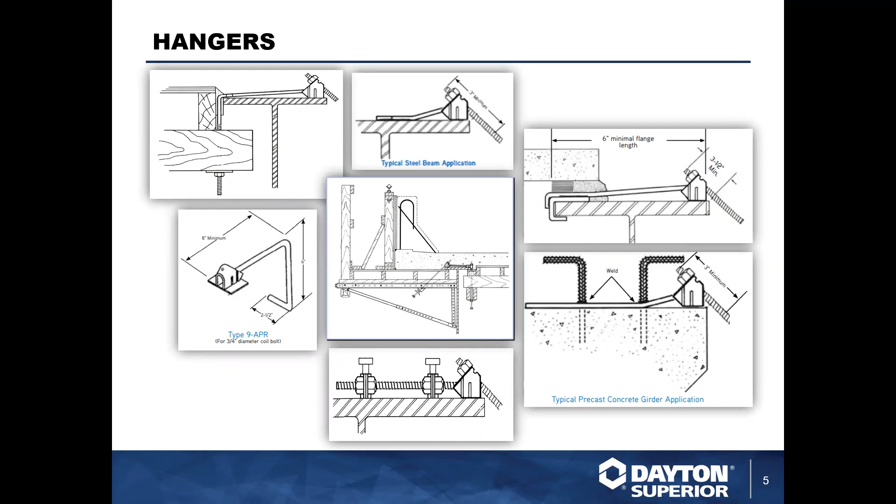Typically steel beams would have hangers that would either wrap around the steel beam or get welded to the top of it. Precast beams would actually require hangers that would be cast at the precast yard into the beam. And if you don't catch the beam in time as far as production goes, we do have hangers that will attach to some of the exposed steel sticking out of a precast girder, such as rebar, or even with steel construction you may have a Nelson stud sticking out of it.

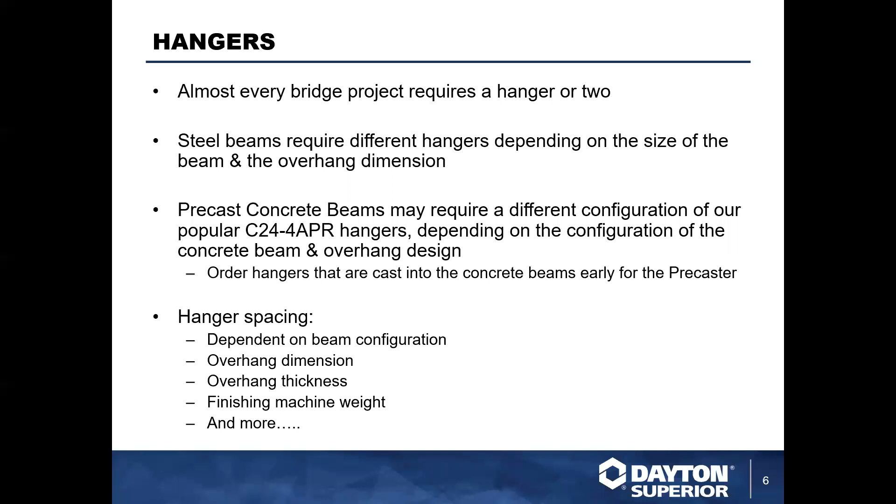Hanger spacing typically depends on the beam configuration, the overhang dimension, how much concrete is suspended off the edge of the girder, and the thickness of the concrete. The big one that a lot of people don't take into consideration is whether the finishing machine is running off of the girder or off the overhang bracket. At any given point, that finishing machine can be 60 to 80% of the weight that the overhang bracket has to support. So typically the concrete weight is minimal, it's the weight of the finishing machine.

So with that, we have overhang brackets. A lot of contractors own their own brackets and everything else. The C49 bracket was one of the original brackets in the marketplace. It comes with a 54-inch horizontal leg, which is the actual formwork support. The vertical leg on a standard C49 is 30 to 50 inches. A C49D is 50 to 70 inches, for beams that are much deeper where they want to get that diagonal leg closer to the bottom of the beam. And then we have the C49S, the S stands for shorty.

What we basically do is modify a standard C49 to get that C49S.

All of these brackets have a 3,750 pound safe working load, that is 2 to 1.

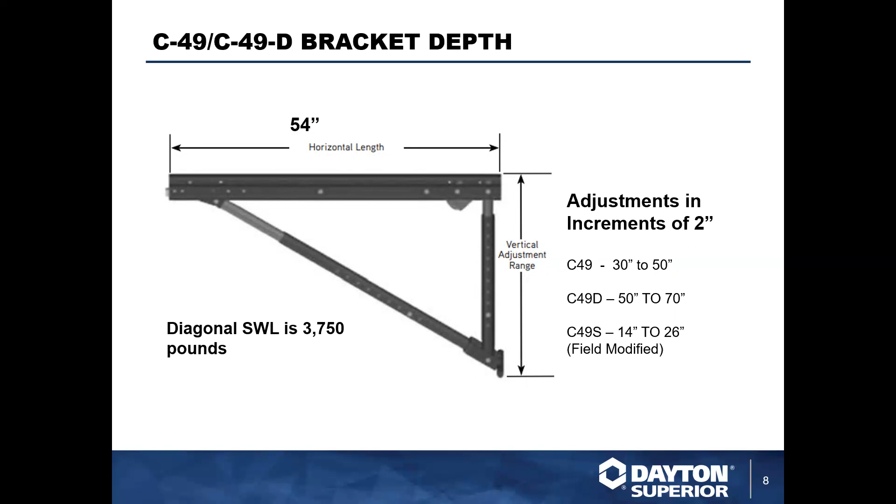All these brackets typically use a standard coil bolt, a 1/2-inch coil bolt. I like to use an adjustable coil bolt, because if you're doing bridge work, I'm going to assume you're not just doing one job and done. A lot of times bridge contractors go from job to job to job. The coil bolt is reusable, as long as it's not bent or corroded too bad. Typically I like the 24-inch because that gives you a long, versatile adjustment, basically a lot of adjustment within that bolt to make the connection. A lot of guys will use shorter ones to shorten connections up. Depending on what state you're working in, that may be completely feasible, especially if you're working in multiple states or have a wide array of bridge designs within your state.

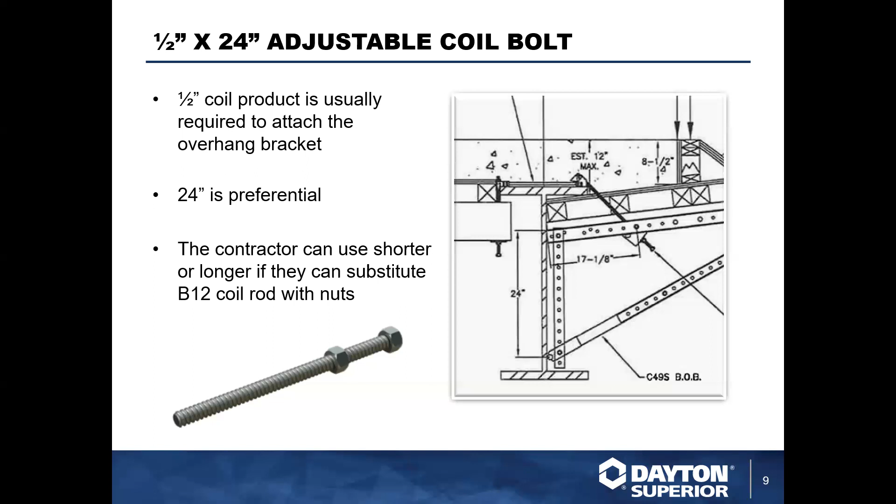We also have a C51 wall plate adapter. This comes in handy for a couple of things. You can cast an insert into a precast box beam and place your overhang bracket off of that, or you can cast an insert into a concrete wall and use the wall plate to attach to your overhang bracket. Now you have your forming package right there, or you can use your bracket as a scaffold bracket. So this kind of double dips as far as the abilities it gives you.

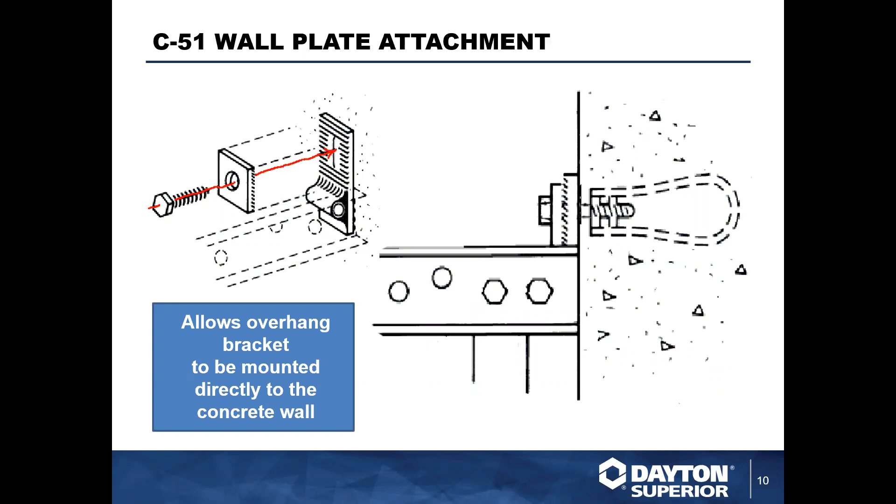Typically it's a 2-component piece. You have the main piece that actually connects to the overhang bracket with that 1/2-inch by 3-inch NC threaded bolt that's already attached to the bracket. And you have a serrated plate, which has serrations on it to give you a little bit of adjustment there.

With that, you also have overhang guardrail extensions. The guardrail extension gives you a maximum of 20 inches of walkway space. I said walkway, so you can put that out there for people to walk on, but they cannot form concrete off of it. It's not designed for that. It's designed for just human foot traffic, or live load.

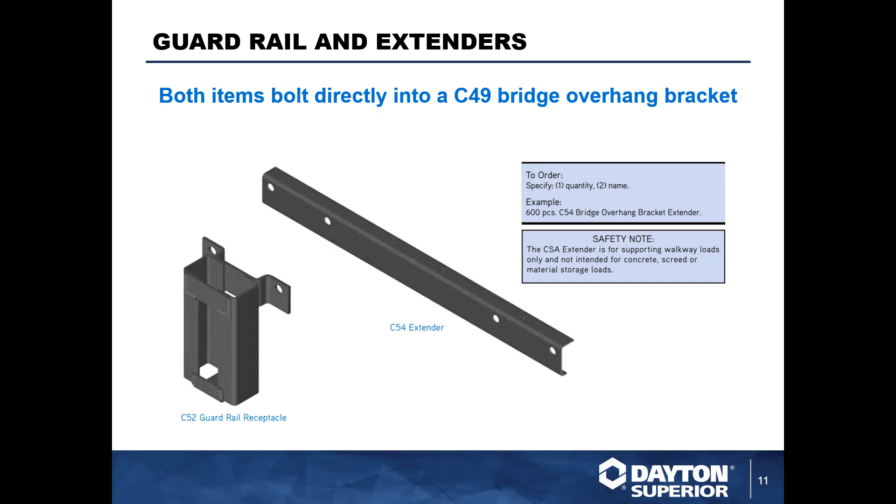We also have our guardrail receptacle. Typically I like to have those on every overhang bracket, especially if my brackets are spaced out at 4 foot on center. This will bolt into the side of the bracket with 2 bolts. The holes are already punched in the bracket to accommodate this guardrail receptacle. This is our C52, and I actually prefer the C52 primarily because the vertical leg on that guardrail is in a strong direction.

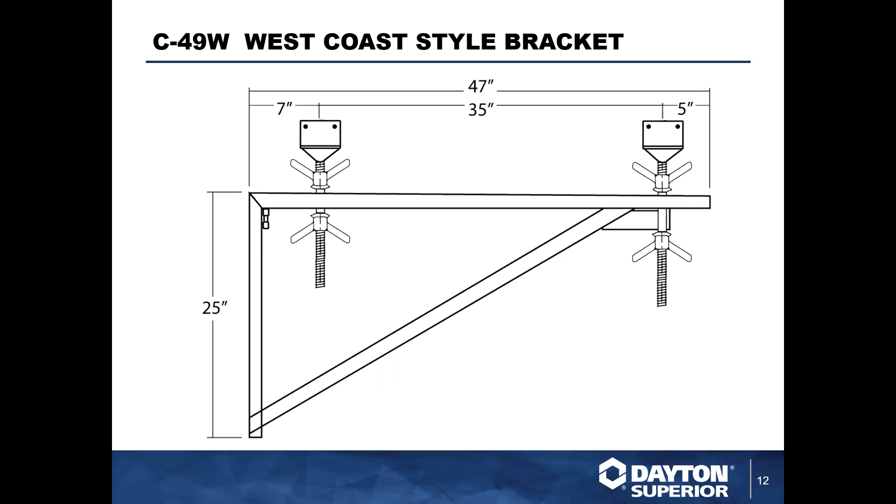Just so we all get the gist of what's out there, there is what we call a West Coast style bracket. This is a non-adjustable bracket as far as vertical height and leg length, etc. But what it does have is a very hefty adjustment within those yokes that can be moved up and down, letting you actually extend the forming piece. You see a lot of this type of bracket used with precast girders, and it was originally called a California style bracket, because that's where it was primarily designed due to the seismic design of the bridges used in California.

This bracket typically can mount very similar to this one, with 3/4 inch hardware, so a 3/4 inch bolt going through your beam. The problem is, when you don't want to drill through that concrete beam, you want to have the precaster sleeve it for you, because in that part of the beam you're going to have a lot of pre-stressed strand, and you don't want to hit those with what you're drilling through. So as you can see, this gives you a lot of adjustability.

It enables you to do a fairly good size haunch with it. Typically, you're going to want to put your finishing machine running off the girder, so the weight of the finishing machine will be sitting right on top of the girder.

With all these brackets, you've got bar supports. Here we're showing you slab bolster bar supports. These are typically going to be used on the lower mat of rebar. They follow the normal code of plain bar support, epoxy coated bar support. Plastic bar support will do anything, basically plain, epoxy, galvanized, and stainless, and our GFR also.

So what you're also looking at here is a lot of times they will have plastic dips on the tips, on the feet, or they will be plastic dipped. This enables them to eliminate any rust or bleed through on the bottom side of the deck, especially if you have a removable wood form.

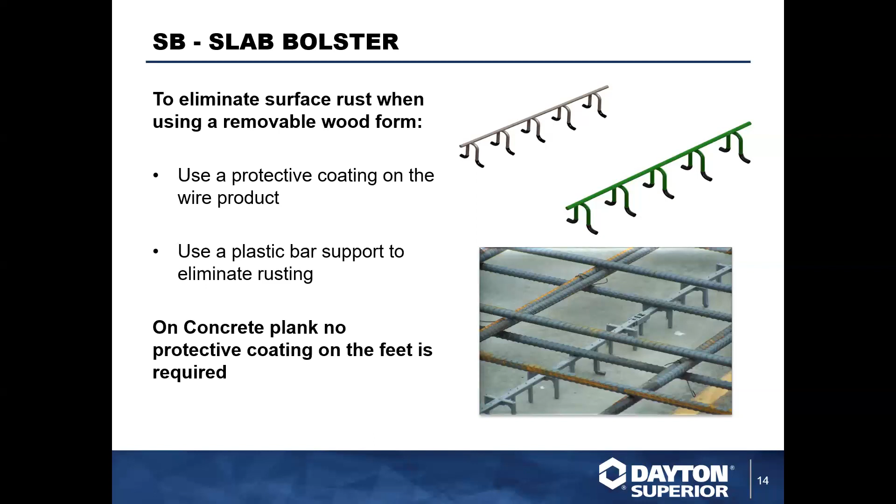If you are using an SIP decking, a lot of times guys will use slab bolster upper. Now this upper material typically is used to support the second mat of rebar in a bridge deck, but you can also use it on the bottom mat to support that lower mat of rebar if you're using SIP decking, because with that bottom runner it spans the corrugations in the steel.

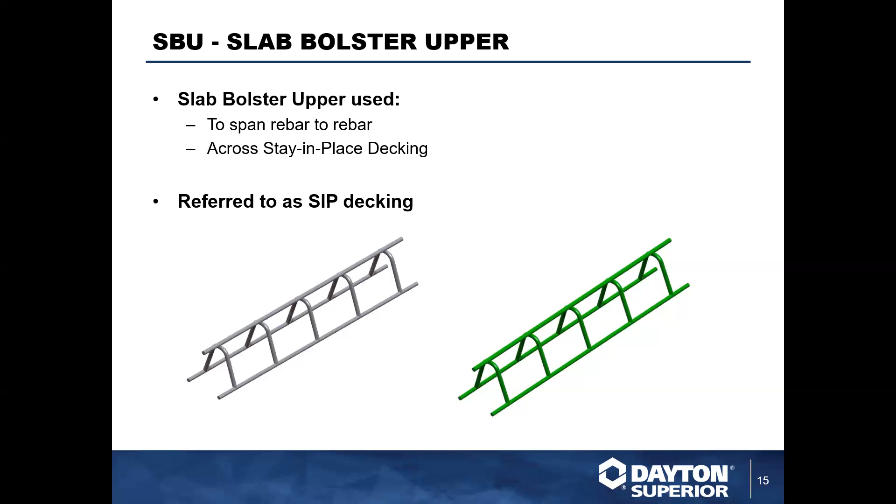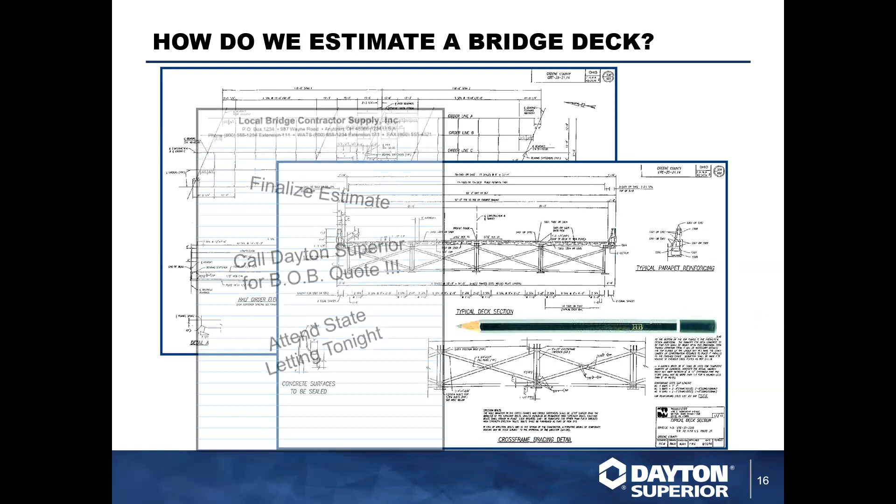With the bar supports, how do we go through and estimate just how many bar supports we're going to need? Well, you're going to need to get a hold of some plans here. You're typically going to need a cross-section of the plan, and you're going to need a framing plan of the project.

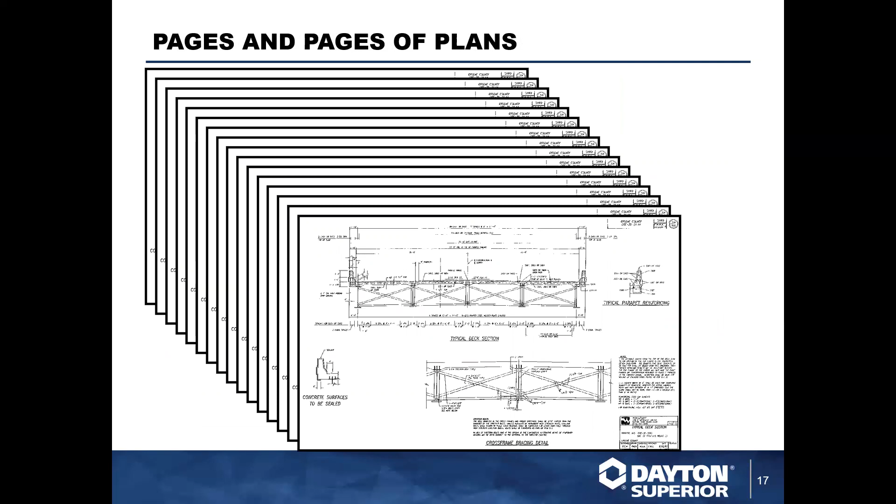To finalize the estimate, get a quote from Dayton Superior. With that information, we can help you out. All of the plans that you typically see, you don't have to worry about. A lot of times people say there's over 400 pages or 300 pages in the set of plans, how do I know which ones I need? Typically, to get an estimate done, we need either 2 or 3 pages, that's about it. So there isn't a whole lot that's required to do a bridge estimate as far as bridge overhang brackets, bar supports, and any of the other accessories we've talked about here.

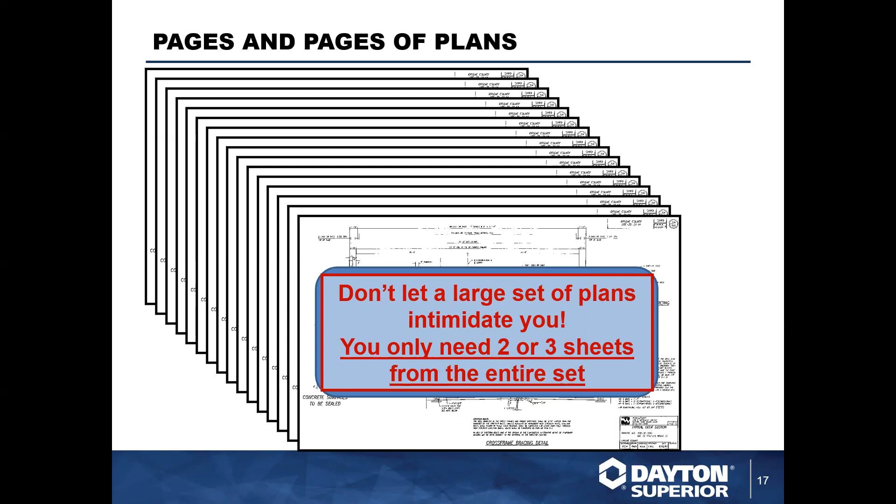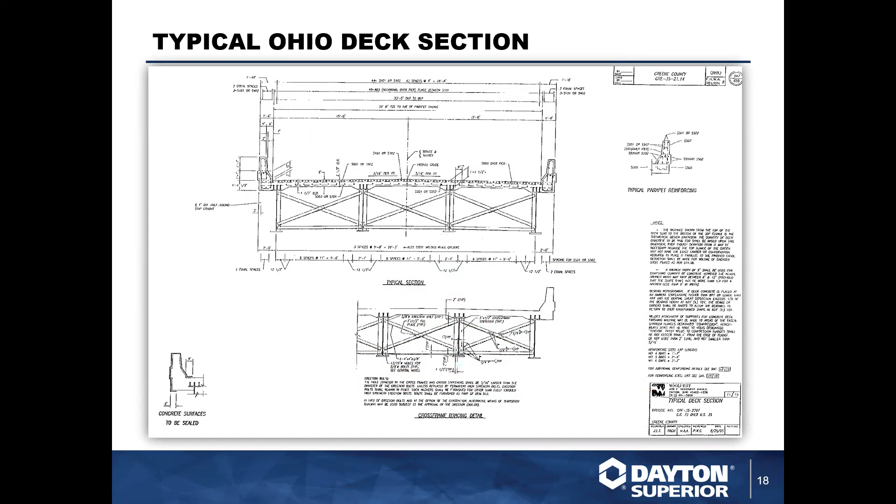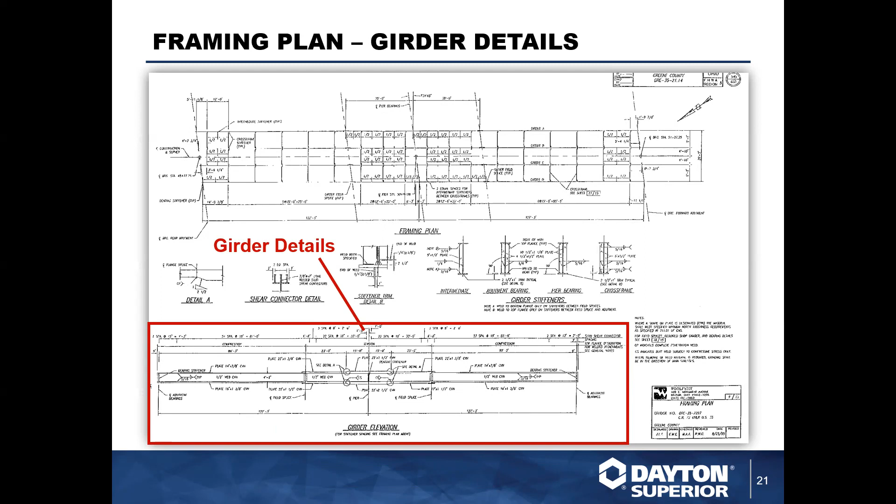So if it's concrete, the concrete girder will be displayed here, and it'll basically have in the section view of the girder the details that go with that, telling you whether it's a type 4, 5, 6, or 7.

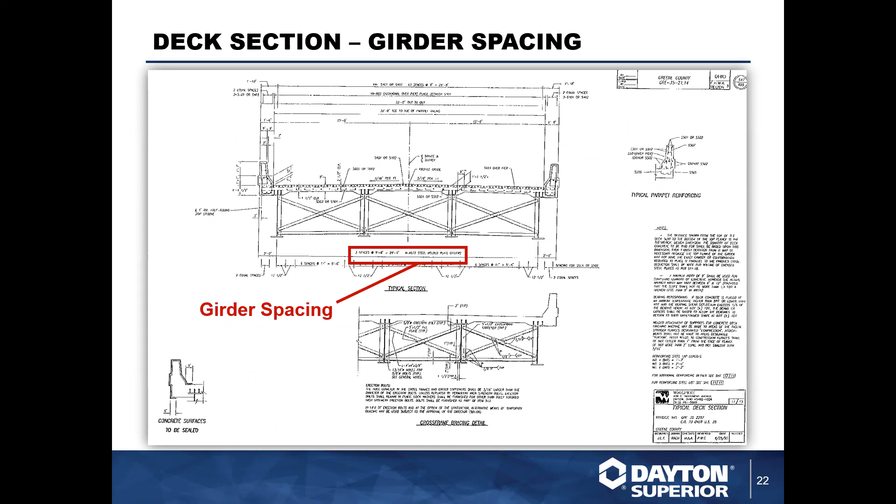Now on the deck section of it, you're going to get the girder spacing. This is going to tell you how far the beams are set from each other. You're going to end up getting the deck thickness on this page, and you're going to end up getting the deck thickness over the girder. That's going to help give you the haunch that you typically are going to have.

And haunch is how far out, what's the elevation of the deck over the top of the girder, the top edge of the girder is going to be. The reason you have it, that varies a little bit, is because you don't want the deck to sit directly on top of it. Otherwise you'd end up having concrete that was 16 inches thick real close to the abutments, and then out at the middle of the deck it would be 8 inches. So this actually helps you maintain a continual deck thickness.

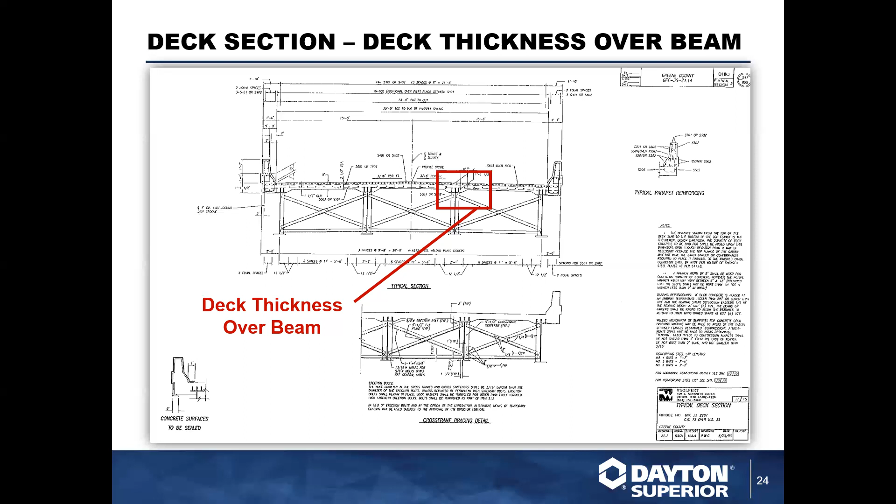This also now is going to give you the bridge width from out to out, so now you know how wide the bridge is. That'll also tell you how wide the finishing machine has to be. And then the contractor can either calculate what the weight of the finishing machine is, or he can contact the finishing machine manufacturer, and they can tell him what the weight is.

The one thing about finishing machines is they're a lot like cars. You can buy a stripped down version, or you can buy the best car on the lot that has all the bells and whistles, but every time you add a bell and whistle, you add weight to the finishing machine.

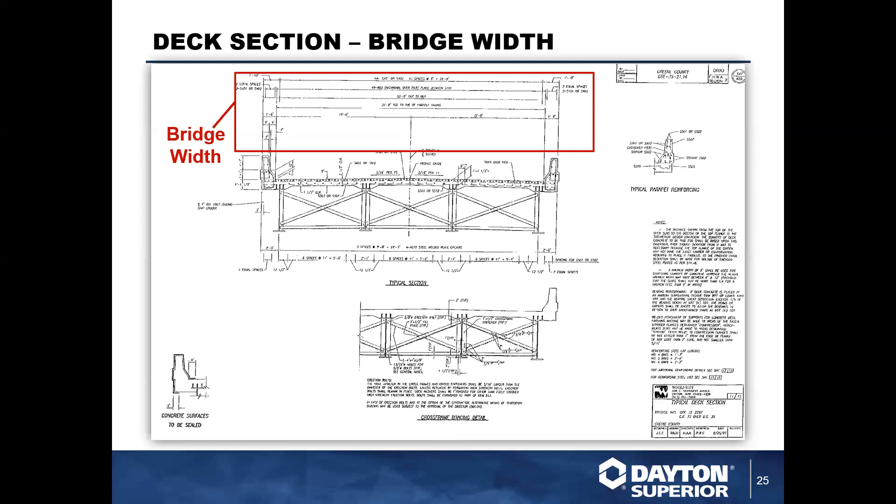So then on the same cross-section view, you've got bottom bar clearance, and you're going to get the rebar size, both in the longitudinal bar and the transverse bar. The transverse bar runs across the deck, and the longitudinal bar runs parallel with the beams.

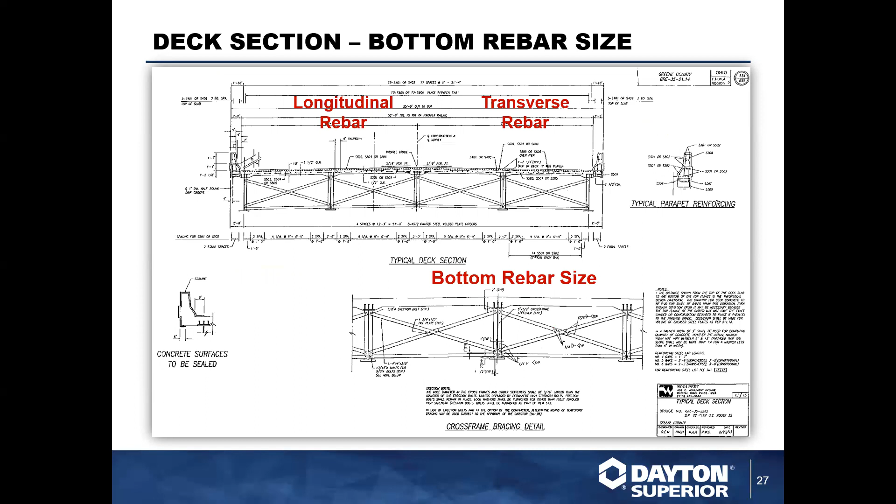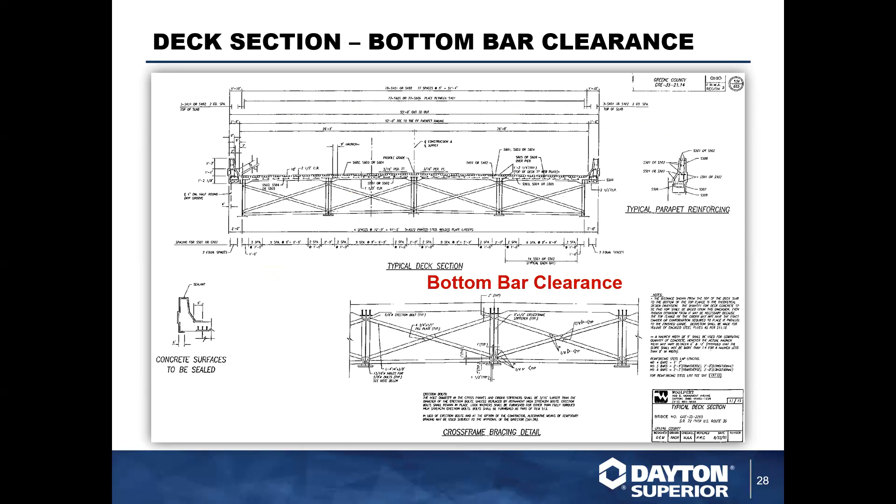You're also going to get the bottom rebar size, and as we said earlier, you're also going to get the bottom bar clearance here. So you've got a lot of the information you already need to start calculating how much bar support you're going to need.

Since the bottom mat of rebar typically has the bottom bar running transversely across the deck, your bar supports are going to run parallel with the girders. So we need to figure out how many rows of girders, how many rows of bar supports, we're going to need to put in place.

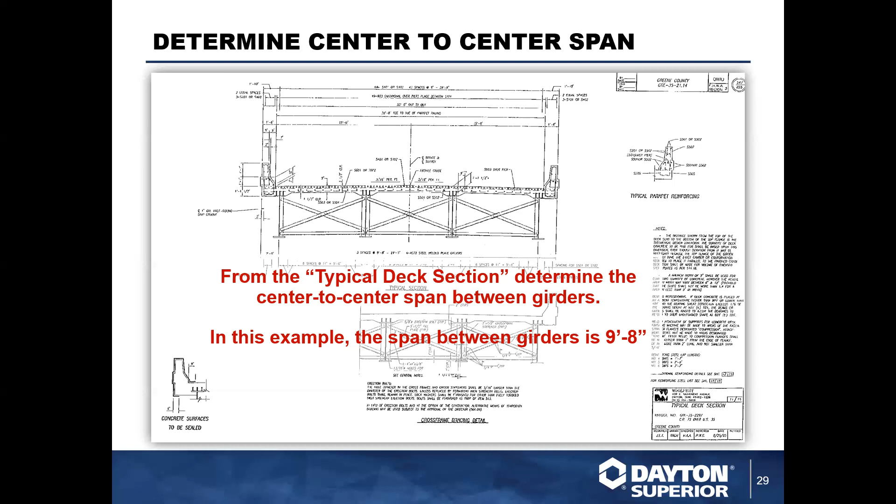Typically, I like to look at my center-to-center span, from center of girder to center of girder, and determine how many rows I'm going to put in place. Then whatever the length of the row is, times how many sections I'm going to put in place, gives me the overall length of bar support I'm going to need for the project.

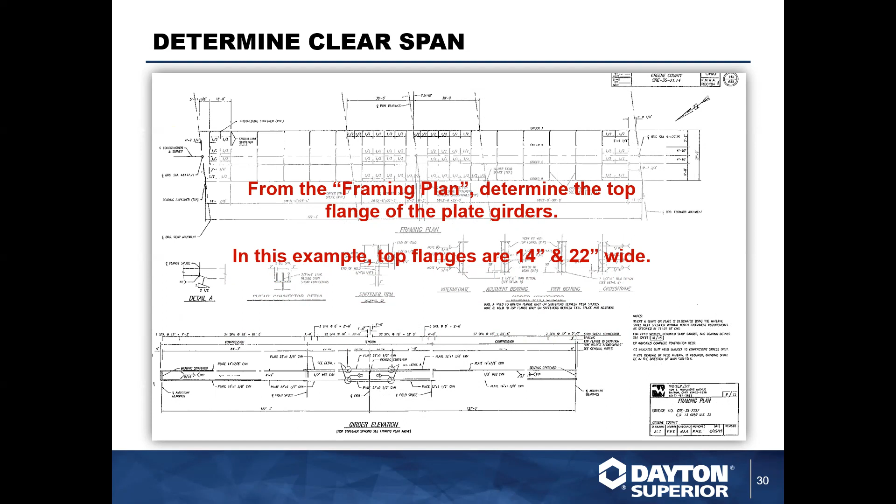So for clear span, we're going to use the smallest flanges, because a lot of times in steel beams, flanges change size from big to little. We're going to work with the littlest ones because that's a worst case scenario, so we don't have to go through this whole thing for every case. Beam flanges sometimes can change 4 or 5 times in a girder, but here we're just going to take one example and run through with it, not worry about the other ones.

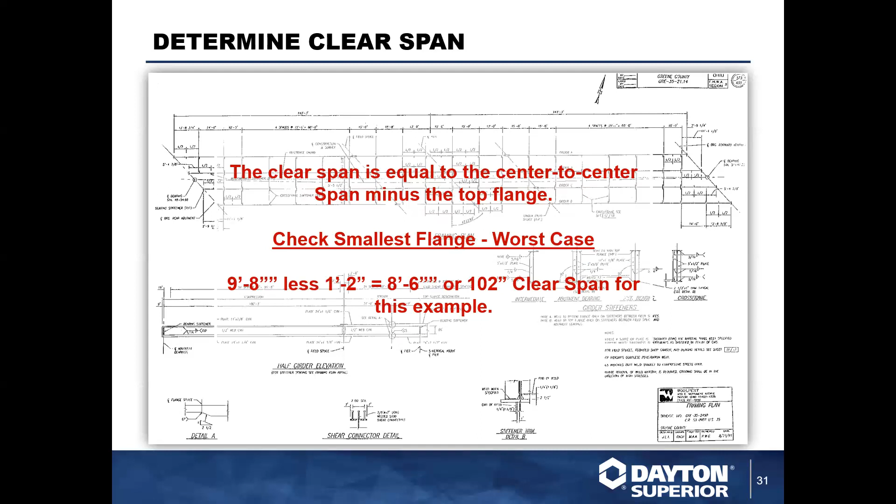Okay, so what we had is 18-inch flanges, so I'm only taking half of each side, deducting that from the center to center, and that gives me my clear span. That's the amount of concrete that's actually going to have to be supported by your formwork, whether it be SIP decking, concrete plank, or removable wood form.

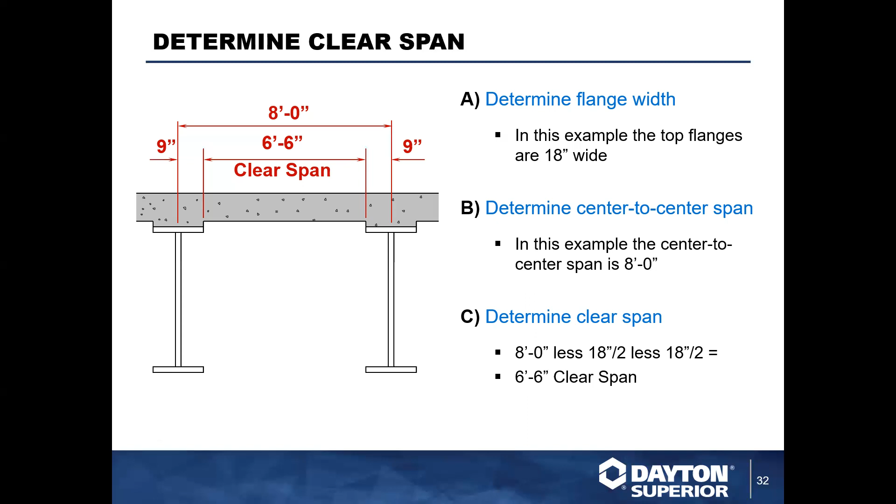So typically, I drew it up here as a removable wood form. This can very well be concrete plank -- the wood form there in between the girders is just an example. It could be SIP decking or concrete plank, but all the considerations we have are still going to be in play here.

So here, if I've got concrete coverage from the earlier slide of 1.5 inches, that was the bottom coverage shown on the earlier drawing section view. Then typically, you've got overall lengths here of 255 feet, so my rows are going to be 255 feet long.

They're going to be 1.5 inches high, but how many rows do I have? Well, your clear span was 6'6". So if I put a bar support on the edge of each side of my formwork, I've got roughly 6 feet still in between. CRSI recommendations are every 4 foot for bar support, so I would put another one in between, giving me 3 per open bay.

So if I had the total number of rows, in this case I have 5 beams -- 5 beams, I think I had 4 beams here -- and what I did is I'd take the 255 times 3 per bay, and with the 3 interior bays I'm showing, I would have 9 rows altogether. So it'd be 9 times 255.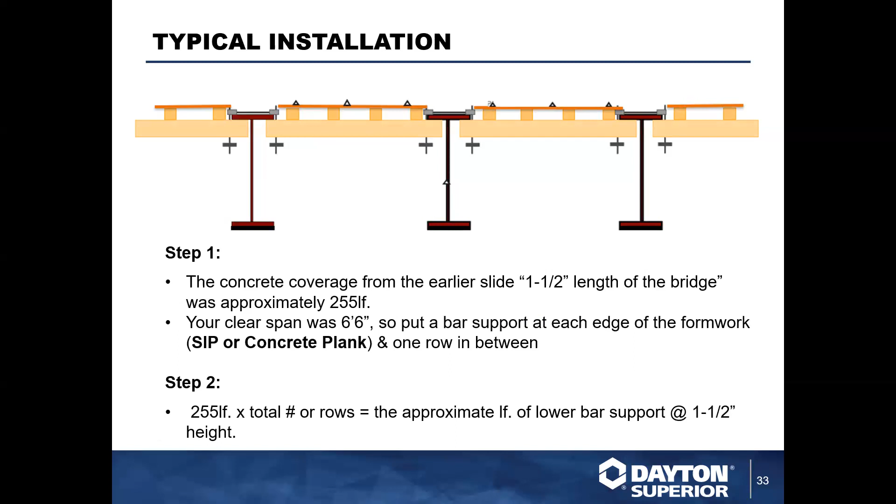That's going to equal somewhere around 2,300 feet, and you add about 5 to 10% for lap, and you're going to end up with that size 1.5 inch bar support.

Now let's figure out what we're going to have for the upper material. The upper material here typically is going to be from out to out of the bridge deck. And this bridge deck here was 33 lineal feet, so I'm going to assume 35 feet to take care of my lap lengths right there.

So typically you're going to take the dimension of the length of the bridge, which was 255 feet.

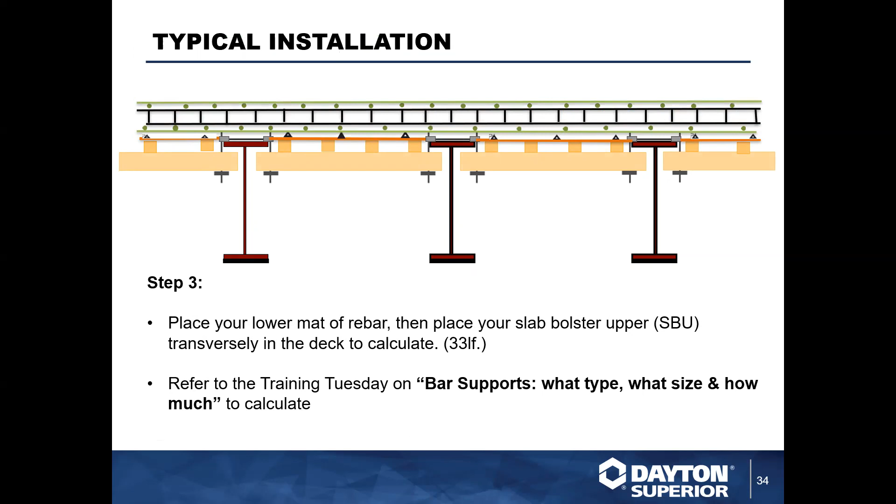Take 255 feet, divide it by 4, because you've got to space your bar supports at every 4 feet longitudinally. That gives you 63.73 rows, not linear foot. We round up to 64, then always add 1, giving 65 rows to start, times the 35 foot out-to-out dimension, which gives about 2,275 feet required.

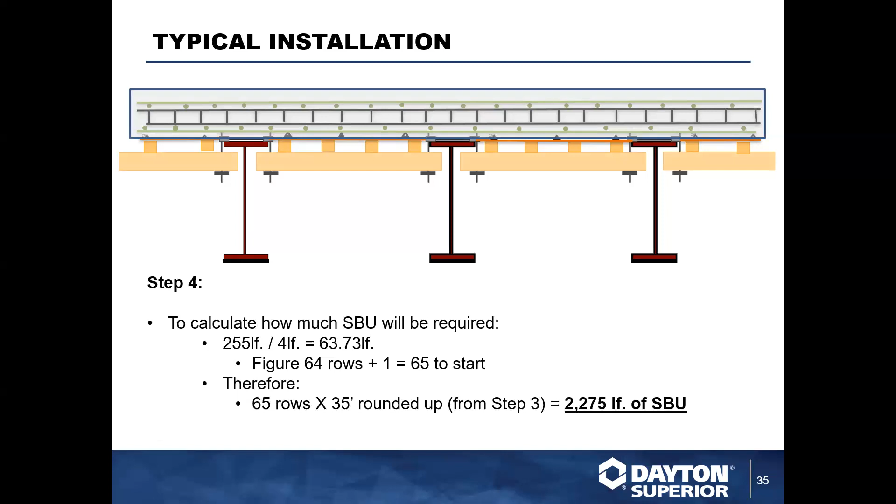Since we had a 2-inch haunch, which we saw from our bridge cross section, and typically 1.5 inch bottom cover, with the beam flange thickness approximately 1 inch, I'm going to use a 4.5 inch chair on the fascia, on the overhang, to support the bottom part of the deck's rebar hanging out over the overhang. That comes from the 2-inch haunch, 1.5 inch bottom cover, plus the 1-inch beam flange.

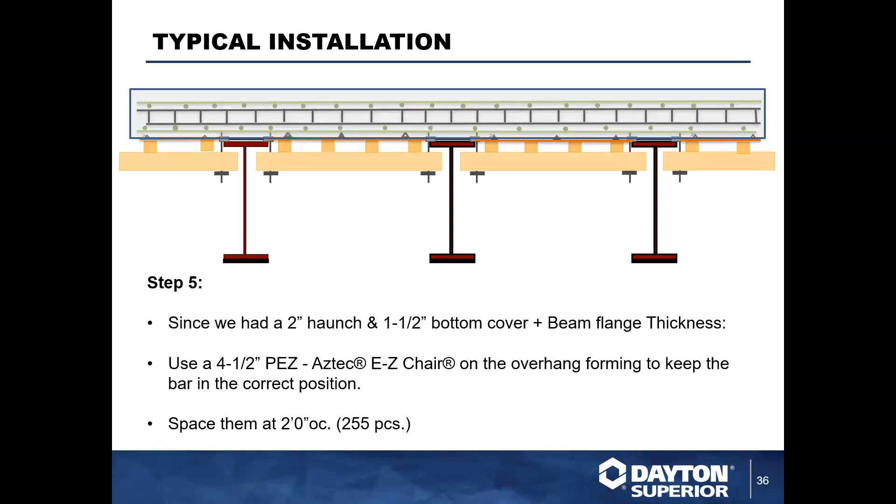Now, with all this information, this is only an example and it can change from job to job. With Dayton Superior, we offer a full line of technical data sheets, handbooks, e-marketing, product pages, and contact information. We have a full engineering group that can help you do any estimates or takeoffs going forward.